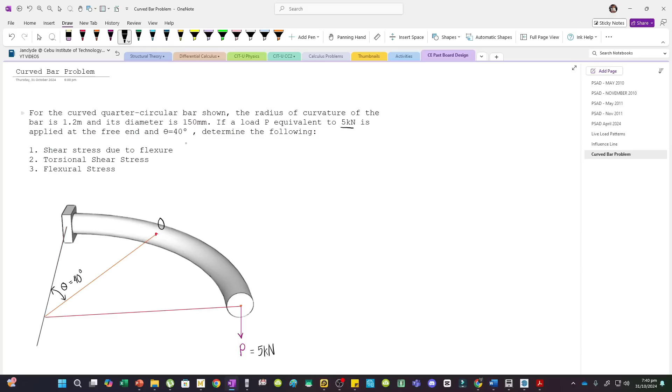So, first natin gagawin is label muna natin yung dimensions natin, saka forces. Yung load P ay 5 kilonewtons, at theta ay equal to 40 degrees. Given din yung diameter ng cross-section ng bar.

Ito yung cross-section ng bar. The diameter is 150 mm.

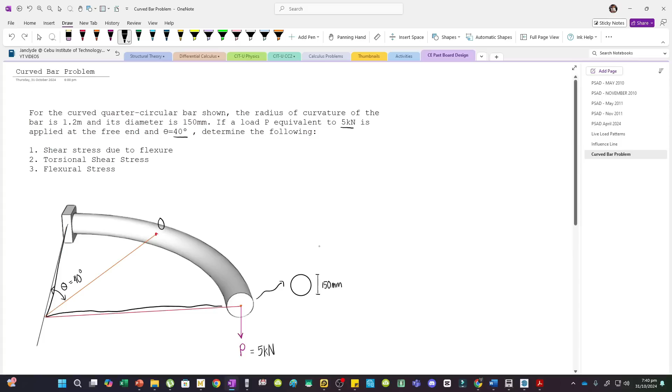Ano yung radius of curvature? Yung radius of curvature, since this is a quarter circular bar, ibig sabihin quarter circle pala to, itong shape na to. This is a quarter circle. So this would be the radius, saka ito rin, radius din to. So this is 1.2 meters, patungo dito.

Sulat natin na 1.2 meters, saka ito rin, from here up to the application of the load.

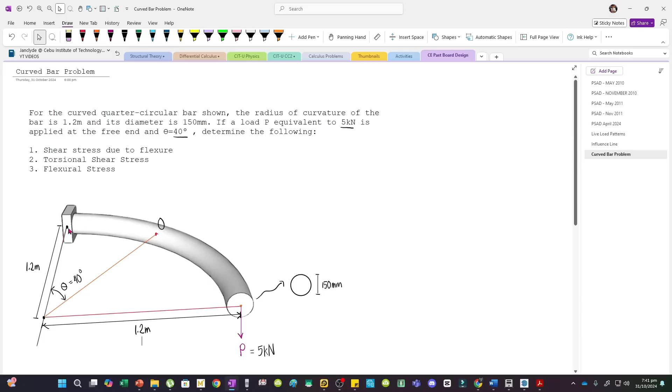Meters. So again, radius yung dalawa, this length and this length, patungo dito sa center ng circle. Sorry, hindi pala ito yung center, isang point pala to along the arc. Mali yung sinabi ko kanina.

So first, what is the shear stress due to flexure? Madali lang ito, although yung wording medyo mahirap. Pero yung shear stress due to flexure, it only means the transverse shear stress. This stress occurs when a beam is bent and is perpendicular to the beam's axial direction. So transverse shear stress, this is simply the horizontal shear stress. Alam natin to, yung VQ over IB.

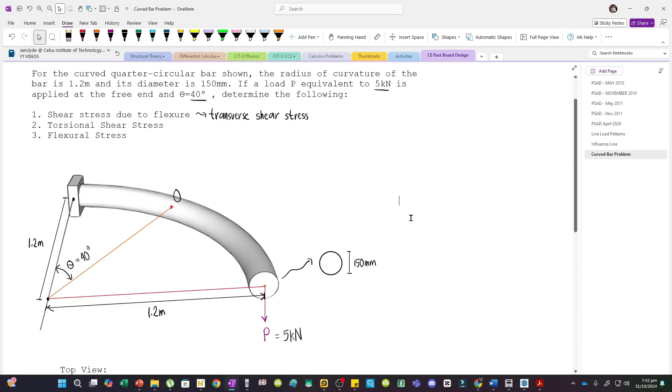Pero meron tayong shortcut formula for circular sections. For circular sections, the horizontal shear stress, tau equals 4V divided by 3A. Ito ay derived formula na from VQ over IB. So, substitute na lang natin lahat.

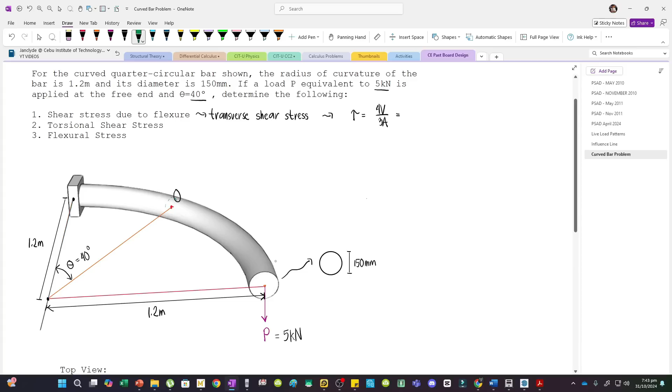We want to analyze this portion, parang yung cross-section na to, yung kailangan natin. This cross-section, wait lang, gawin natin mas accurate yung drawing.

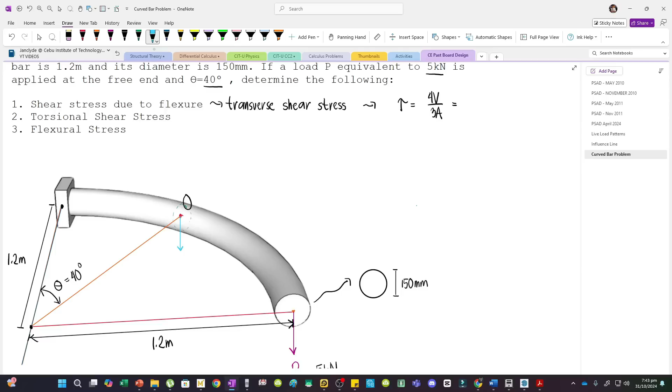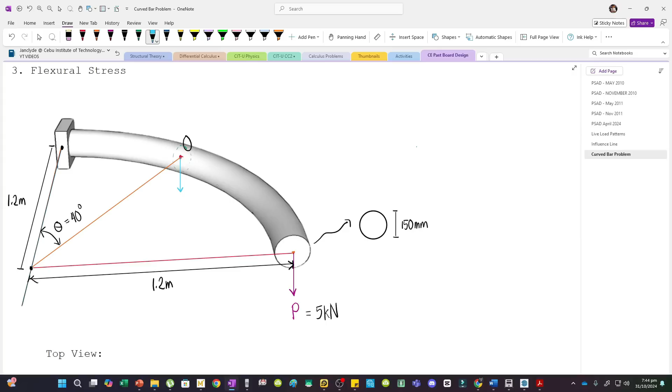I think yan, so we are to analyze this cross-section and then we must transmit the 5 kilonewton force, mapupunta kasi yan dito. Ibang kulay na lang ito. Parang meron kasing reactive force dyan, at meron ding force na matatransmit dyan. Yung moment na makukause niya, yung twisting saka bending moment, ilalagay na lang din natin dito sa section na to. So this would be 5 kilonewtons transmitting the force lang muna, wag na muna yung twisting moment saka bending moment.

So the shear force is 5 kilonewtons. So we would have 4 times 5 kilonewtons, convert this to newtons, so times 1,000, para maging MPa yung sagot natin, kasi Newton per mm squared. Then divided by 3a, so 3 times the area.

Yung area na tinutukoy dyan is the area of the cross section. So 150 mm yung diameter. Therefore, we can use pi over 4 times d squared, or 150 squared. Input na lang natin: 4 times 5,000 divided by 3 times pi over 4, multiplied by 150 squared.

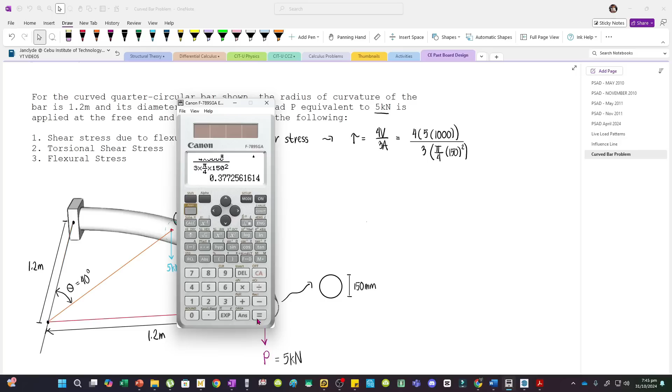Divided by 3a, yung area natin na tinutukoy dyan is the area of the cross-section. So area would be pi over 4 multiplied by d squared, times 150 tapos naka-square. Input na lang natin: 4 times 5,000 divided by 3 times pi over 4 times 150 squared, equals 0.377. And then this is in MPa.

Medyo madali lang yung number 1. Yung mahirap lang sa number 2 saka number 3, kailangan natin yung twisting moment saka bending moment, which is hard to identify pag hindi mo pa alam paano i-draw yung figure.

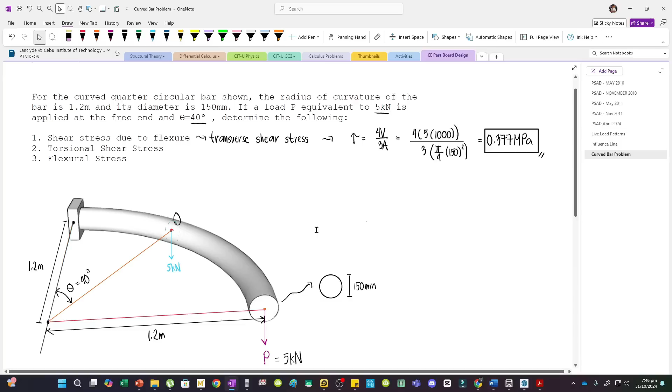Sige, so yung technique ko dito is from the center, this is a quarter circular bar, diba? So from here, I would draw a line patungo sa, diba, this is point O, and then this is a line connecting to the center of the circle. So we can draw a line here that would be perpendicular to this line.

Now, why do we need this? We need this para makuha natin yung twisting moment saka bending moment. Now, ano yung distance or moment arm na magkukos ng twisting? Ano din yung distance na magkukos ng bending? Now, for twisting to happen, it must be this moment arm. And then, for bending to happen, it will be this moment arm.

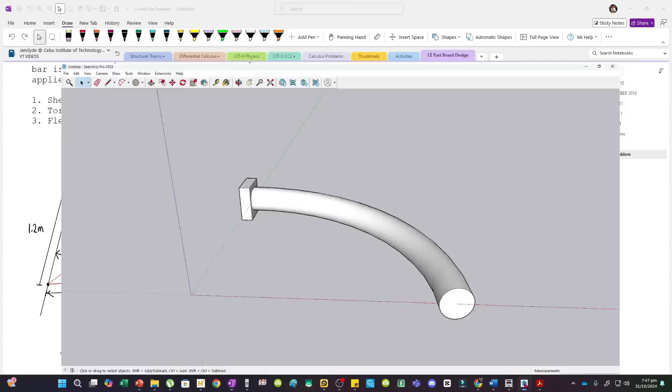Para mas madaling maintindihan, open ko lang yung SketchUp file ko. Let's say we are to analyze the bending stress and torsional shear stress sa point na to, sa fixed support.

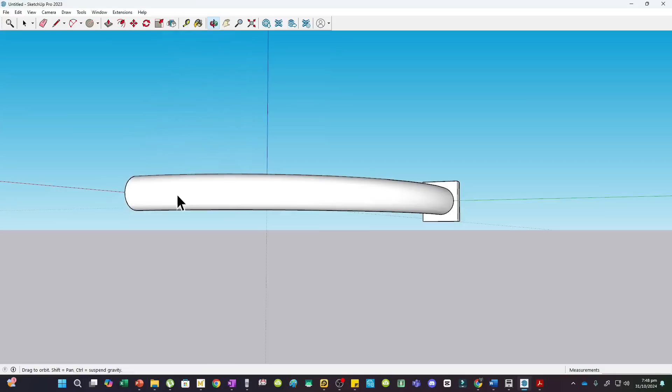Diba, pag titingnan natin yung beam na nakaganto, or let's say, pag ganyan, naka-flat. Diba, if I will apply a force here, downward, magbe-bend yung beam. Diba? Parang magbe-bend siya na pag ganyan. Na-imagine lang ba?

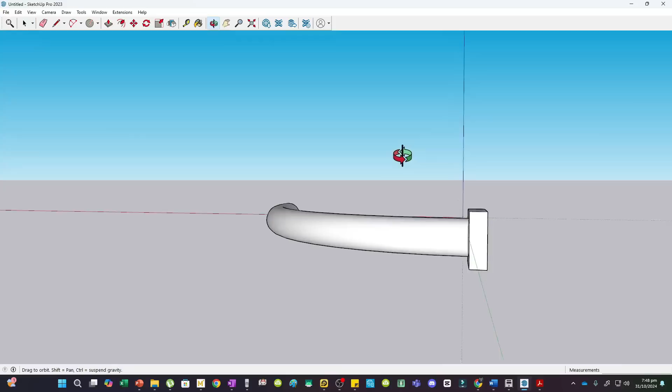Bale, this moment arm, this distance, yung naka-red, that will cause bending. Kasi diba, yung red na distance, ito yan. Kapag tiningnan natin na naka-flat siya.

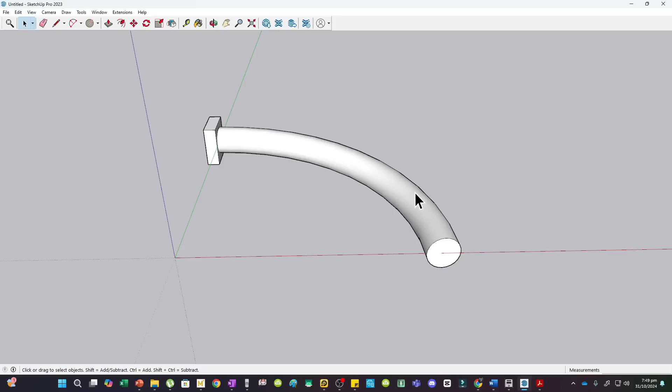But then, what if my moment arm is itong naka-green? So, let's say we are to apply a force here, downward na force. So, diba, pag mag-a-apply ka ng downward force dyan, twisting will also happen. Bale, yung beam mo, wait lang, paano ba to?

So, tinagal ko na lang yung fixed support ha. Imagine nyo na lang na meron pang fixed support dyan. Yung gusto ko lang makita nyo is, bakit kapag ito yung moment arm natin, magti-twist siya. And then, kapag itong red naman, bakit siya magbe-bend?

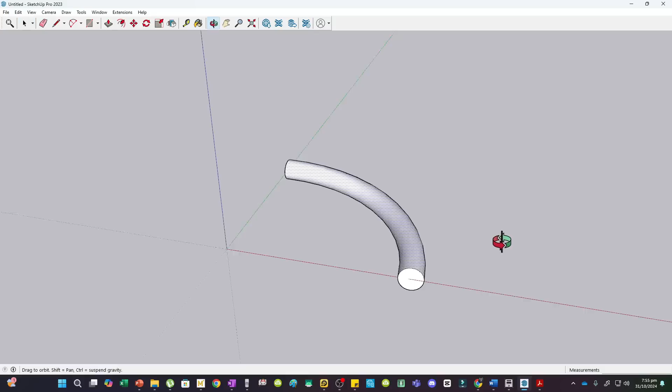Ito yung mangyayari. So, click muna natin yung figure, and then rotate natin. So this is the axis of rotation. Let's say we are to bend the beam. So diba itong red na axis yung kailangan natin. Parang ganito yung bending niya.

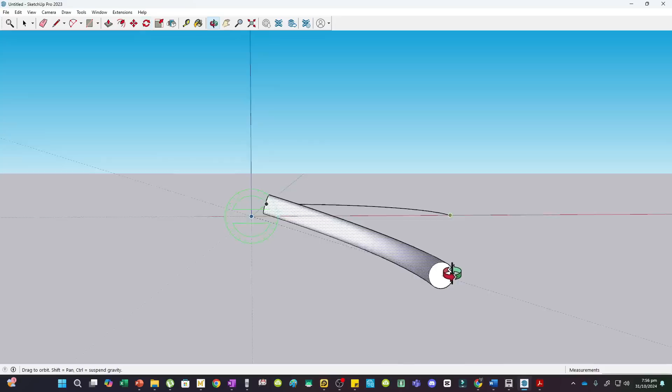Notice na kapag nasa 2D view ka, parang normal na bending lang. Normal bending sa beam natin, usually for cantilever beams. Or kung titingnan mo dito sa likod, parang bending lang yung mangyayari. Iba yan sa twisting. Ito naman yung mangyayari kapag twisting.

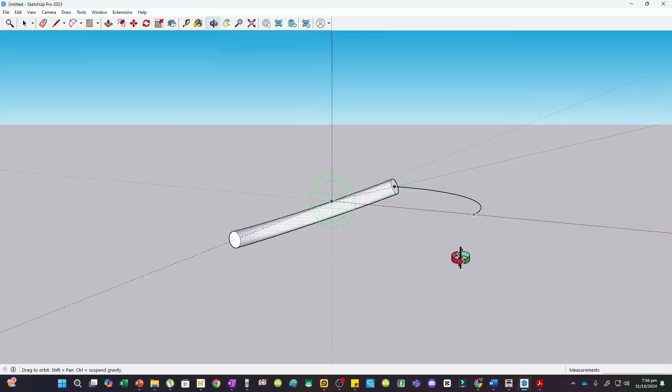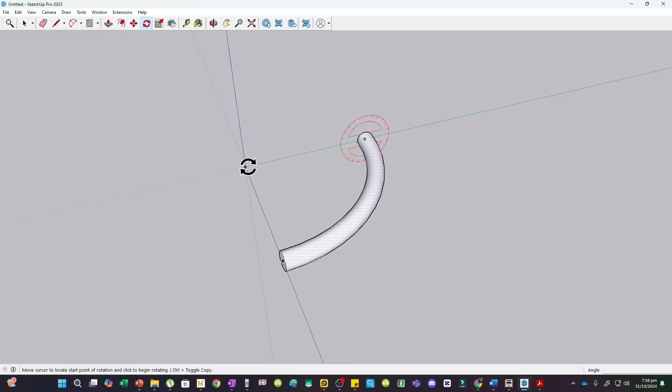Papakita ko, click lang natin to and then rotate. Ito yung fixed point, diba? Naka-fix ito. And then rotate natin yung figure using the green axis. Nakasnap na yan sa green axis. So, kapag i-move ko siya, ito yung movement.

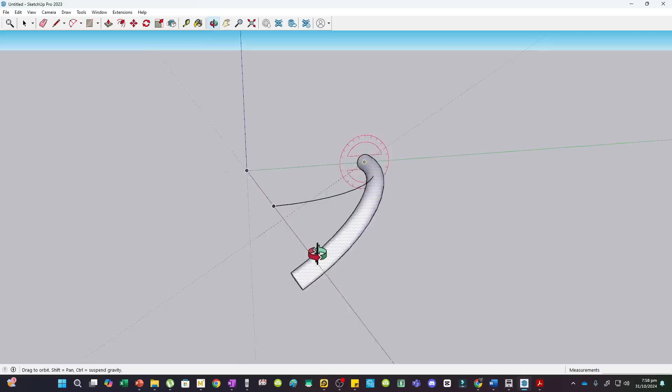Diba? So, kung mapapansin nyo, ano yung nangyari? Itong naka-black, naka-line, yan yung original position ng beam. So, kapag i-apply mo yung load with the green line as your moment arm, then twisting happens. Yan. Twisting happens. Again, iba yan sa bending.

So, balik tayo. To identify kung ano yung magkakos ng twisting or bending, tinitingnan ko na lang yung original talaga, yung sa curved quarter circular bar. So, diba, this moment arm caused twisting, while this moment arm has caused bending.

So, yung kadikit nito, let's say, if you will close this one, rotate mo yan, diba, magpa-parallel na siya dito. And then, ito naman, if you will rotate this one a bit, it will be parallel to this line. Meaning, this line pala will cause twisting, while this line will cause bending.

Pero yung twisting, dito lang siya magsa-start ha. Sa point of intersection, sa line na to, connecting point O to the center, and the center of the circular bar, connecting to the center din. Ito lang yung moment arm na magkukos ng twisting.

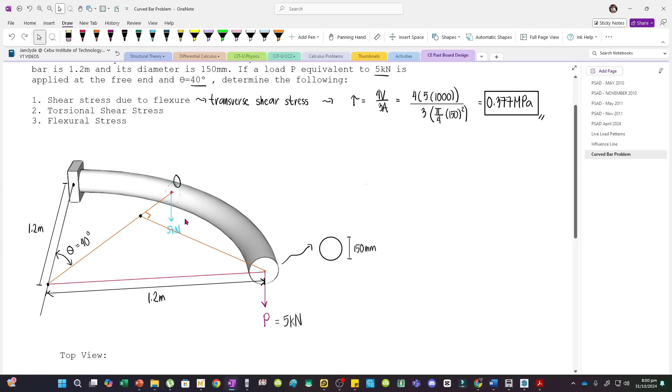Now, para mas maintindihan nyo yung distances, meron akong top view sa bar natin. So, i-draw na lang natin yan. Ito siya. Gagawin ko na lang din, yung magkukos ng torsion, gagawin kong kulay blue. And then yung magkukos ng bending, gagawin kong kulay red. So, diba alam natin na this is for twisting, itong moment arm na to. So, lagay natin yan.

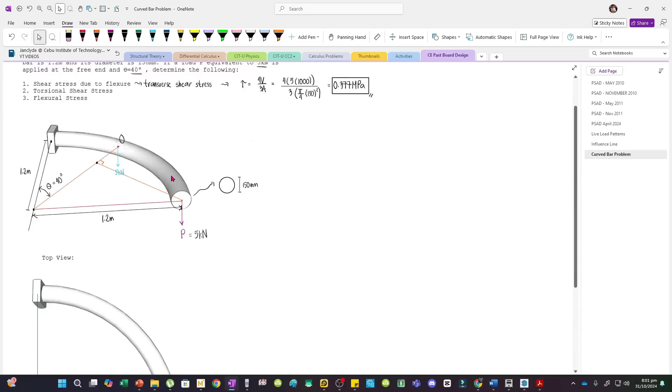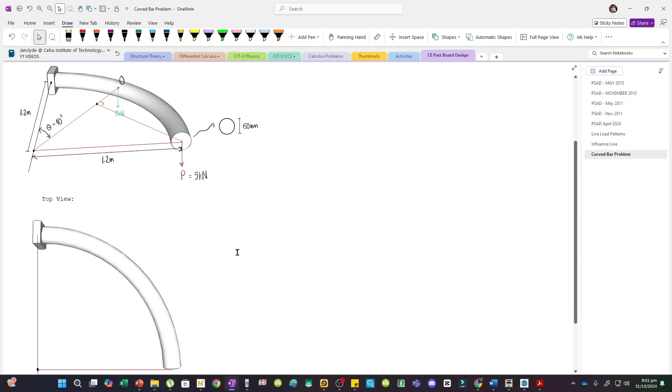Torsion, and then for bending, it would be this moment arm. So we would have this line - again, red color for bending. This is the center of the circle, and the point we are analyzing is point O, which is somewhere here. So this would be 40 degrees.

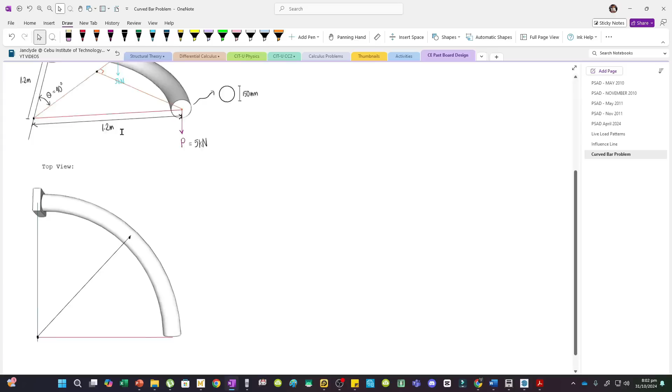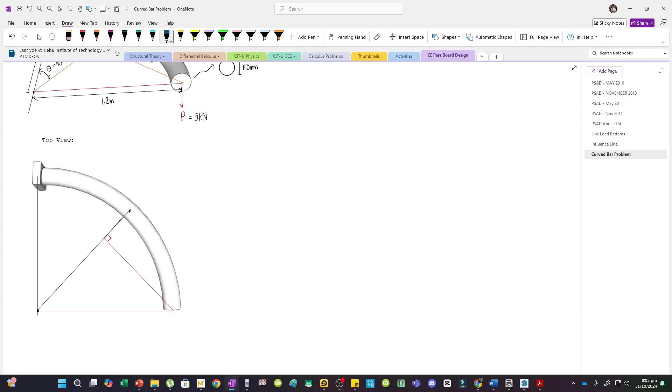Let me rotate this. And then let's draw a line from the center which would be perpendicular to this line. So this is perpendicular. And then again, the one causing twisting, let's color it blue. This is the moment arm that causes twisting.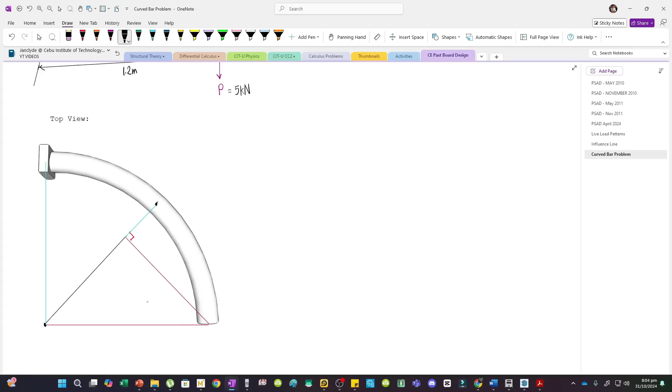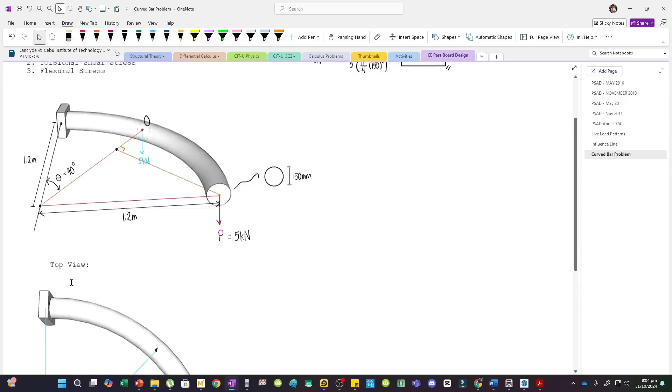Let me erase this, then color it blue - sky blue so it's clearer. So this causes twisting, and this one causes bending. Now we know this is 1.2 meters, the radius of curvature, and also this one is 1.2 meters. We are given the angle 40 degrees, so this is 40 degrees. Now since this is a right angle, this angle must be 50 degrees.

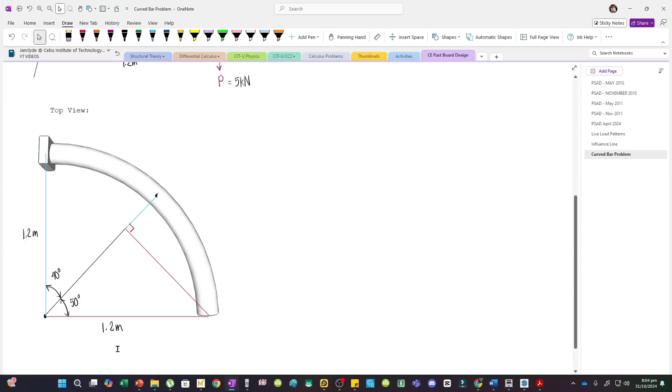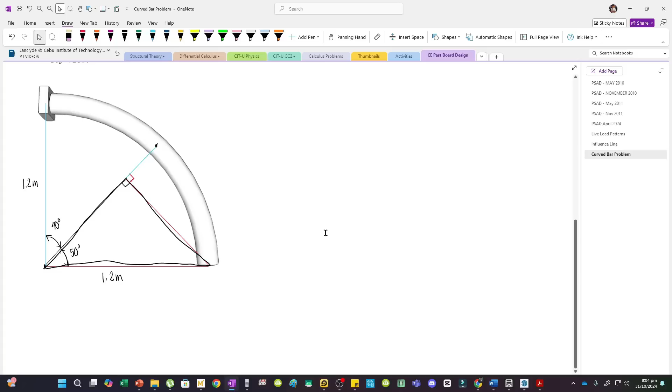So let's try to measure the distances. If this is perpendicular, this is also perpendicular. So we can actually look at this triangle and use relationships in trigonometry. If this is our reference angle, this would be the hypotenuse, and this would be the opposite side. What would be the opposite side? We can use the sine function: sine 50 equals opposite over hypotenuse. So the opposite side is the moment arm for bending.

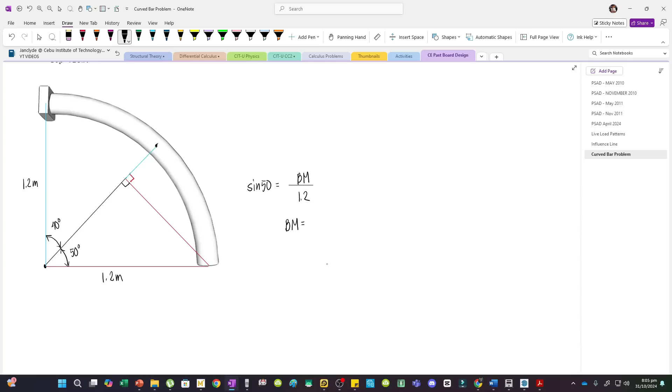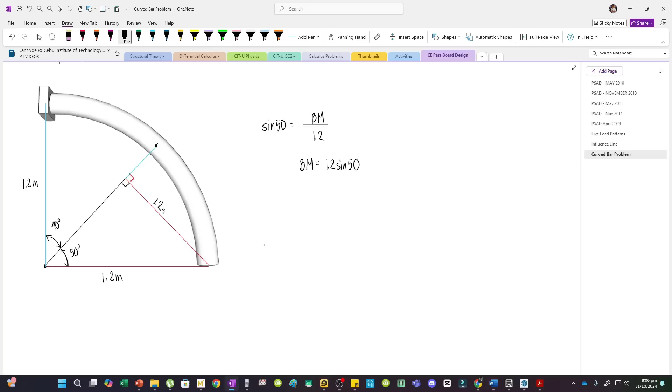So let me label this as bending moment arm, or BM, divided by the hypotenuse, which is the radius, 1.2. Therefore, the bending moment arm would equal 1.2 sine 50. Or you could skip this step - it's automatic - once you have the hypotenuse, you can just multiply it by sine 50 or cosine 50 to get the adjacent or opposite sides. I showed it just to review. So let me write this as 1.2 sine 50 - that's the distance.

This is the one colored red. Now, how can we determine this distance? This is a bit of a problem. To determine this distance, we can get this adjacent side of the triangle. Again, this is a right triangle, so we can actually extend this - it's parallel to this line, our dimensions. So this length would be equal to this one. Now this length is 1.2 cosine of 50 degrees.

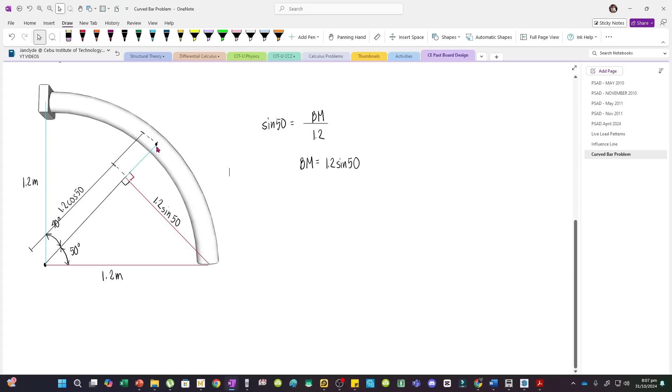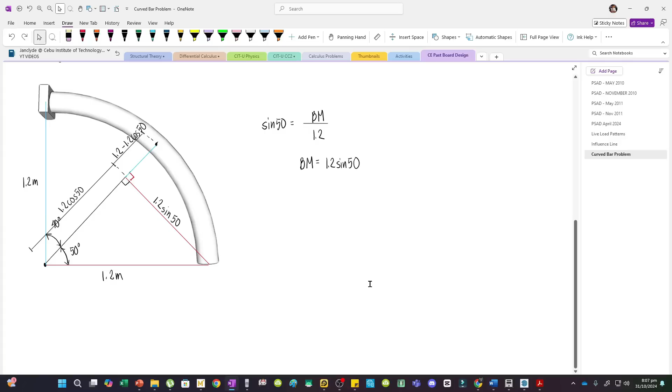Since that's the adjacent side, so 1.2 cosine 50. Now this length would be 1.2, which is the radius, right? From the center going to here, that's the radius. So the radius, we subtract 1.2 cosine 50 - that's this distance. So this would be 1.2 minus 1.2 cosine 50, the radius minus the adjacent side of the triangle we just formed. I hope you agree. So now we can solve all of this.

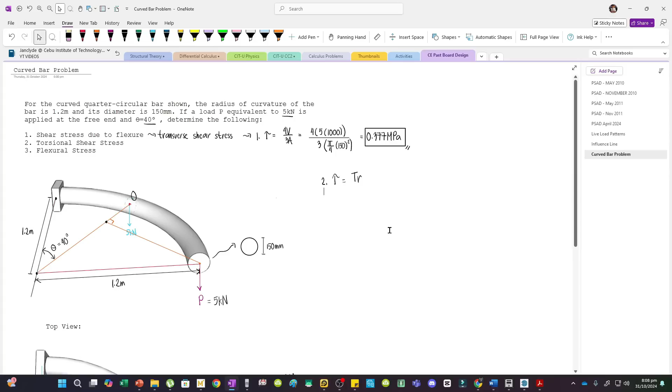For number 2, we are required to find the torsional shear stress. The formula for torsional shear stress would be TR over J. Let me put this here for number 1, then for number 2, torsional shear alone, so TR over J. Our twisting moment would be this load multiplied by the moment arm, so there's twisting that will happen. Let me draw the direction. So there's twisting and also bending,

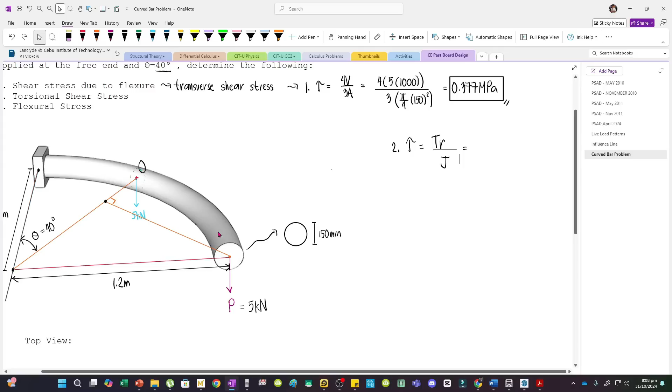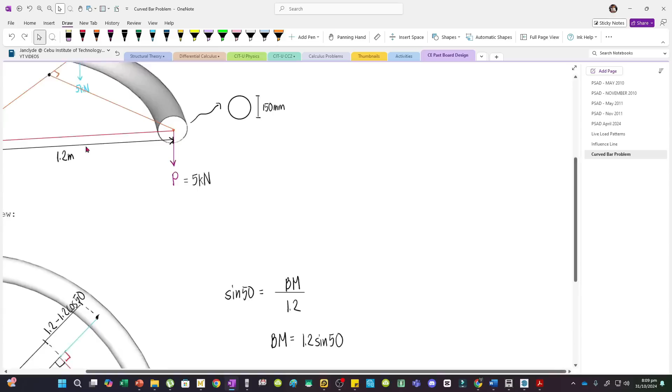which you can't really see on this axis. Anyway, just try to imagine this figure with reactive moments or twisting moments. If I put arrows, it might confuse you since this isometric view doesn't quite work for both. So the twisting moment would be 5 kilonewtons multiplied by the moment arm. The moment arm that causes twisting is 1.2 minus 1.2 cosine 50.

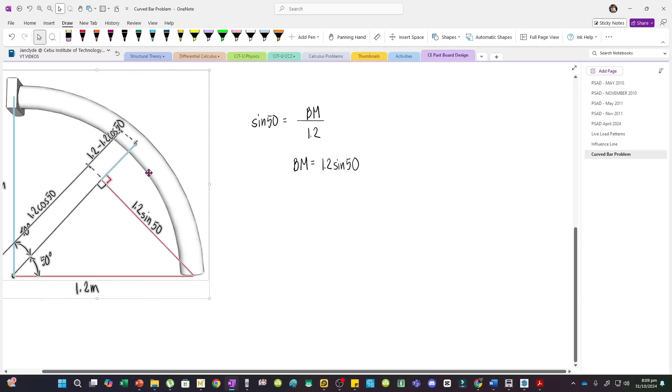Now take note these values are in meters, diba? Kasi naka-meter yung radius natin. And then divide natin by J.

So J would be pi over 32 and then diameter to the fourth, diameter of the cross section. So 150 mm, multiply mo lang by 150 to the fourth. Ayan. By the way, nakalimutan natin yung R.

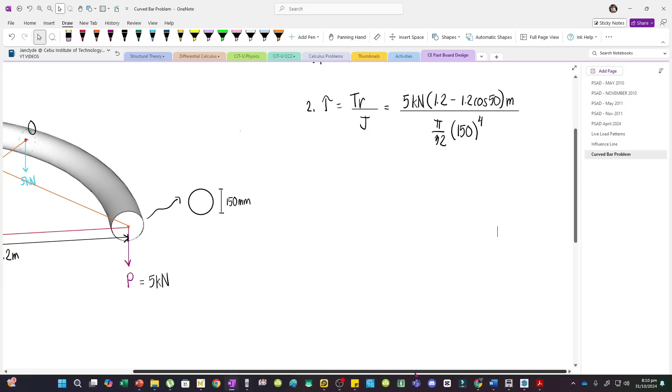Ano yung R? R is the radial distance farthest to the neutral axis. Madali lang yan kasi for circular sections, it will just be equal to the radius. So itong R, it will just mean the radius lang din. And kapag hollow naman, hollow circular section, it would be the outer radius kasi mas malaki yon na radial distance. So we still have to multiply this by half of 150. This would be 75 mm.

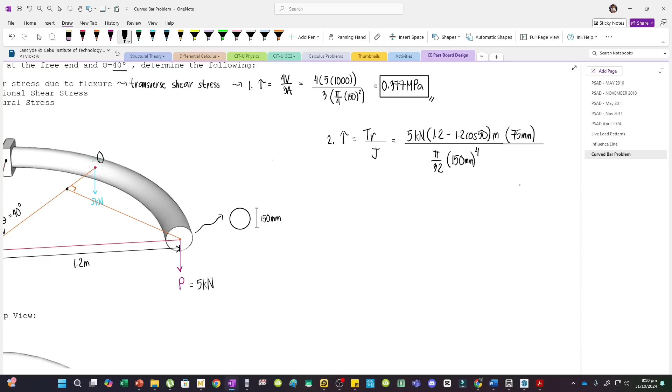Ayan. Now take note, hindi consistent yung units natin. For a while lagay ko yung unit dito, this is also mm. So naka mm. Para makuha natin yung sagot in MPa, then we have to convert this into newtons, and yung meter, we have to convert that into millimeters. So kailangan natin i-multiply pala by 1,000 twice. The first 1,000 will convert kilonewtons to newtons, and the second 1,000 will convert meter into mm.

So ito yung pag-type mo dapat sa calculator, or you can just, sa Canon, you can just type E6. Papakita ko yan. So dito, you can type 5 times 1.2 then minus 1.2 cosine 50. Then times 75, then E6 na lang. Yan yung pinaka-efficient na way na ma-type mo to.

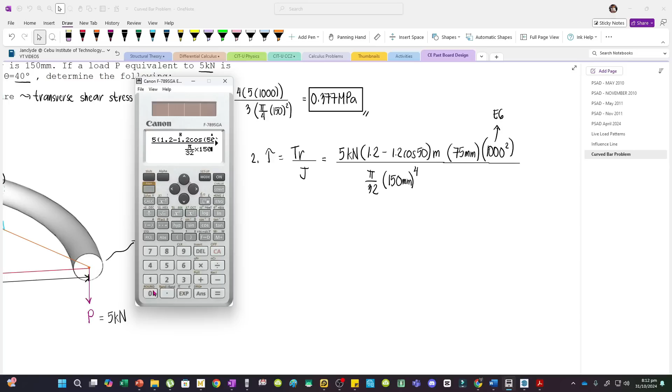Then divided by pi over 32, then times 150 to the fourth, equals 3.234. So this would be the shear stress due to torsion alone.

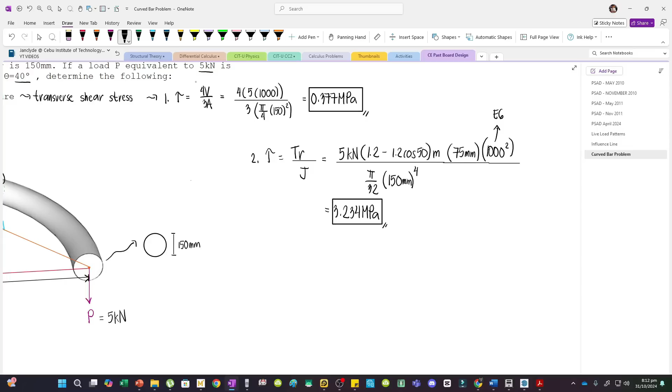Ayan. So, meron na tayong torsional shear stress. Finally, we are to solve the flexural stress. So yung flexural stress, di ba, this would be the bending stress. Itong bending stress, medyo madali lang yung formula kasi gamit na gamit siya. FB equals MC over I.

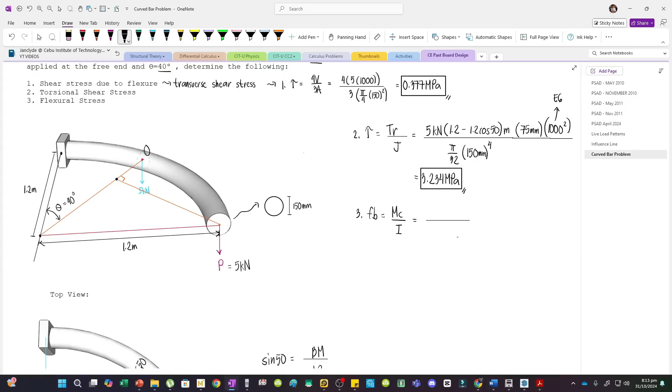Now, para sa torsional shear stress, we needed the twisting moment. But dito sa flexural stress, we would need the bending moment na. So gagawin natin, MC over I, and M will be 5 kilonewtons. Then, ano yung moment arm for bending? The moment arm for bending would be this one.

Yung nakakulay red, which is 1.2 sine 50. Diba? So times 1.2 sine 50. And then again ha, naka-meter yan. So we must multiply this by 1,000 squared or E6.

And yung C natin, it would be the farthest distance from the neutral axis. So this is still the radius lang din. Half of 150 kasi diba, the neutral axis is here, sa gitna lang. So to the outermost fiber, it would be 75 lang.

75 mm. And then divided by pi over 64 multiplied by 150 to the fourth. Ayan. 64 na kasi bending na, bending stress. Isang axis lang yung magre-resist. Dito kasi naging pi over 32 siya kasi parang dalawang pi over 64 pag i-add mo magiging pi over 32 na.

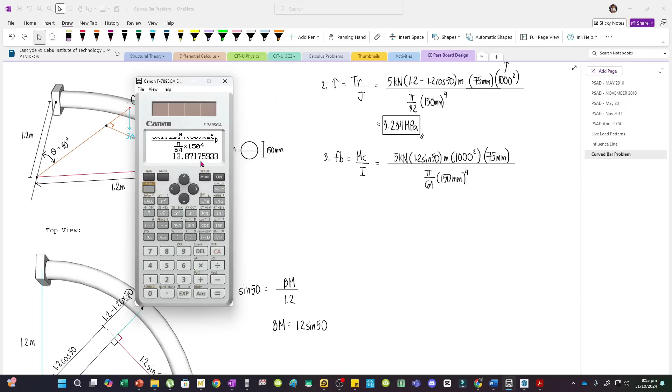Sige, so input natin 5 times 1.2 sine 50 then times yung sinabi ko na lang E6, and multiplied by 75 divided by pi over 64 then times 150 to the power of 4. So equals 13.872. So naka-MPa din yan.

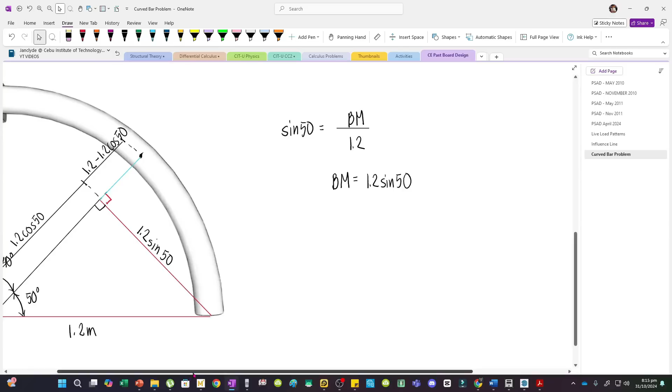Sige, so ito na yung mga sagot natin. Again ha, this was the moment arm for twisting. And then, ito naman yung moment arm para sa bending naman.

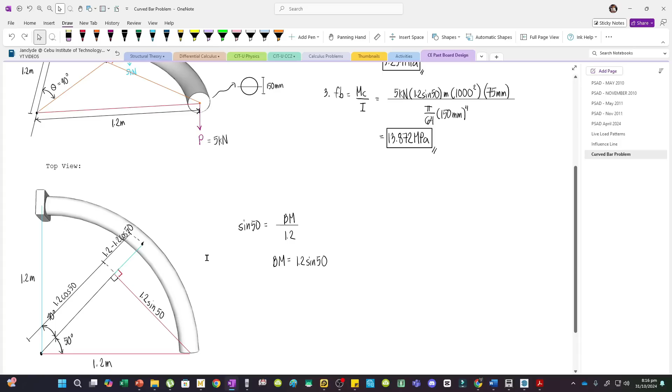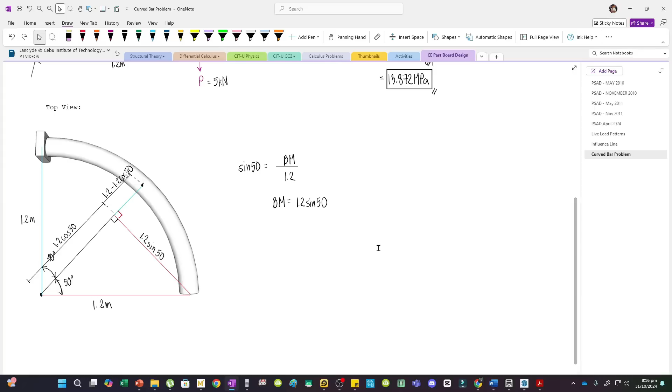Sige, so I hope may natutunan kayo ngayon. This is a bit different ha, sa na-discuss ko dati. Meron kasi akong video dito in Bisaya. Pero yung nangyari doon, a force is applied at a certain point along this curved bar. And then, what was analyzed was the maximum bending stress and maximum shear stress dito sa fixed end. So iba yan. Baka ma-mix up nyo yung dalawang given, i-clarify ko lang na magkaiba itong mga problems na to.